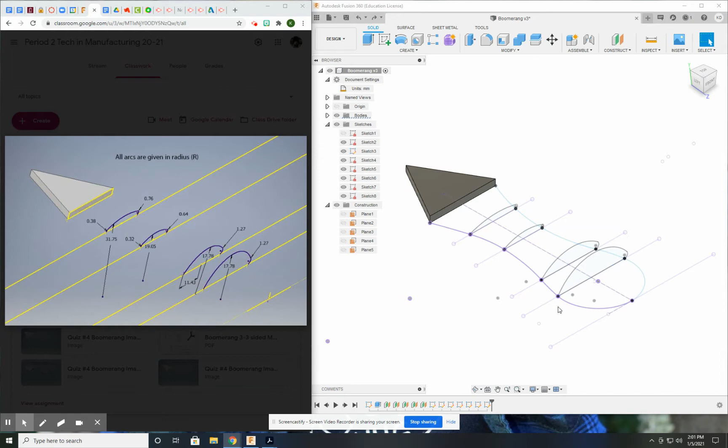So at this point, we have our two guide rails made of arcs, and we created all the profiles that we need. Now, just try and loft it and see what happens. Now, a lot of times it does not loft the first time, so don't get discouraged if that happens. There's very, very often problems that we need to go fix.

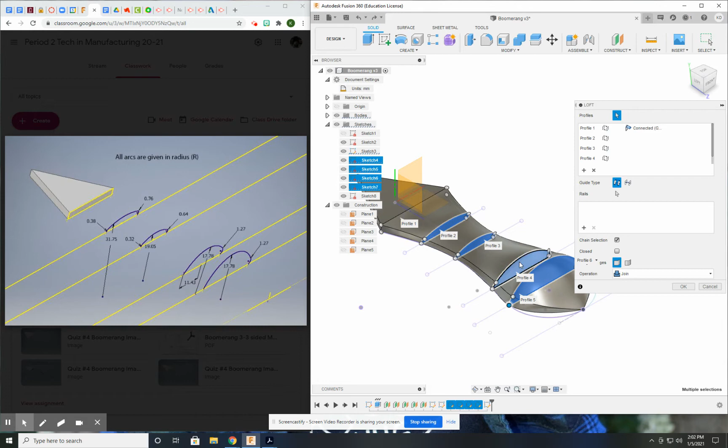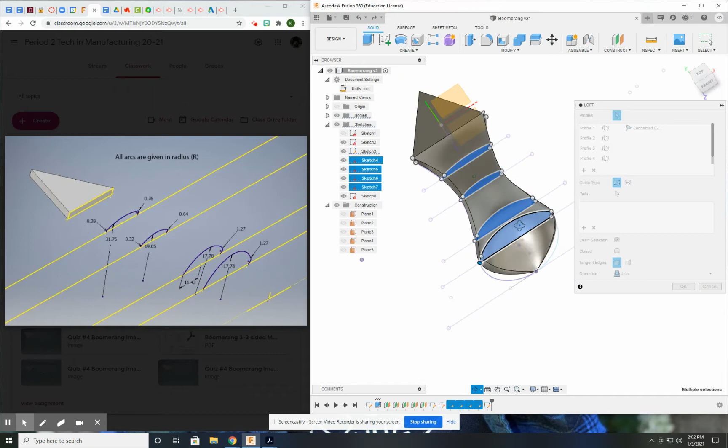All right, the good news is that everything lofted. The profiles are correct. That part actually looks very good. As you can see, though, without my guide rails, there's a lot of area here that the computer doesn't convert into that solid. And that's the specific reason we need the guide rails. There's a lot of lift here that we're going to lose if we don't use the guide rails. And for a boomerang, pretty important.

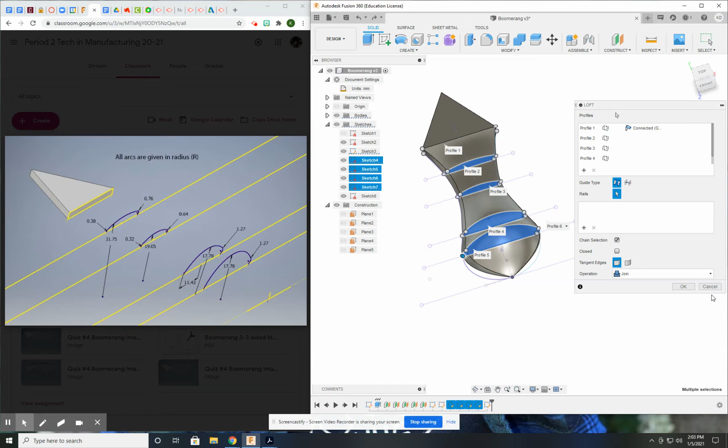All right. So what I can do is try and put my guide rail in right now, but I can tell you right now that there's a problem. Do you see how the arcs that are highlighted are all separate? When I hover my mouse over, this needs to highlight as one single arc or series of arcs that form the guide rail. I made them tangent to each other, so quite often in most programs that will be enough to make it one guide rail, but in this program, which seems to happen a little bit more often than some others, it's not working. So let's go back and do this a different way.

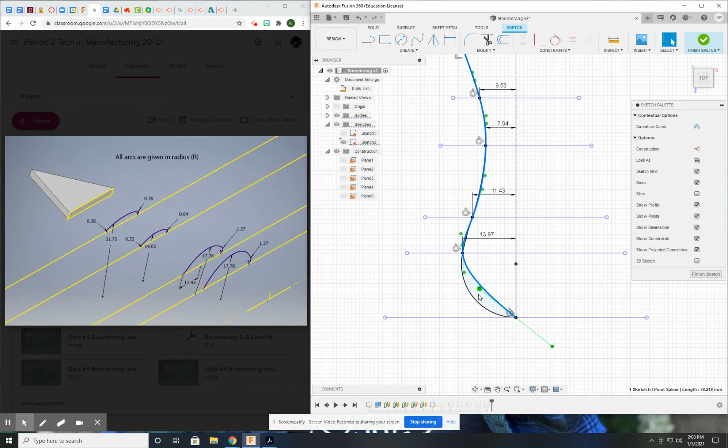So I'm going to go back to my sketch here, and I'm going to use the spline tool, and I'm going to lay it just for demonstration purposes right over the existing series of arcs. And you're going to see that I can get almost the same guide rail shape as if I was using arcs, which is very nice because we really want that smooth, continuous look and feel to it. So if you look right here, gosh, it is almost exactly the same as the set of arcs that I was using. So what you're going to need to do is delete your arcs and just use the spline.

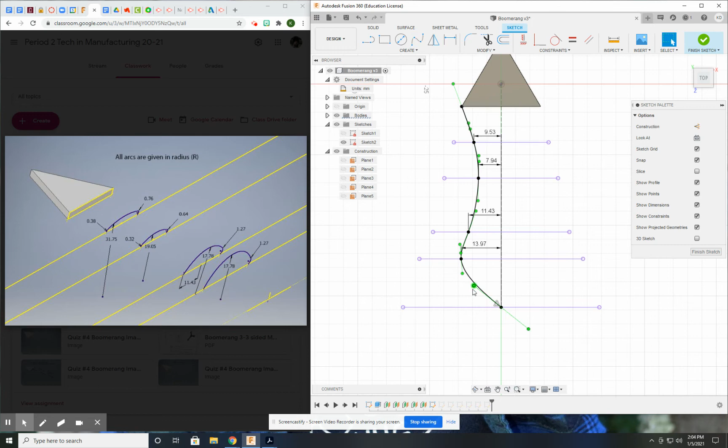Now you may be able to do it right on top, but I'm just going to go ahead and delete the arc and replace it with a spline tool. All right, my points stay, grab the spline tool, use the first option, connect the dots, and then the only thing you really have to do is just do a little modification on this one here to make the tip significantly more rounded. All right, that actually looks really good.

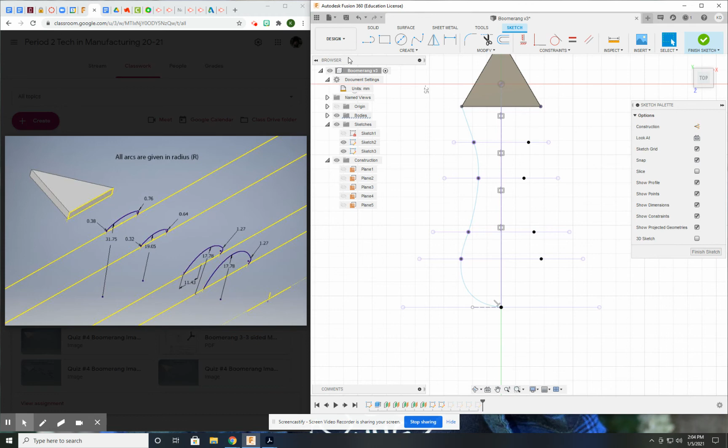I'm going to do the same thing on the right side. No, it's giving me a warning. Let me create a new sketch. Delete that guy. All right, now let's go to the other side, the right side, and do the same thing. Now, because I didn't move any points, there's no problem here as far as losing... if you delete any of these points, you're going to have problems with your other sketches. But as long as my points stay and I only delete the arcs, it shouldn't be an issue. I'm just going to kind of mirror what I see on the left side. And that actually looks really good.

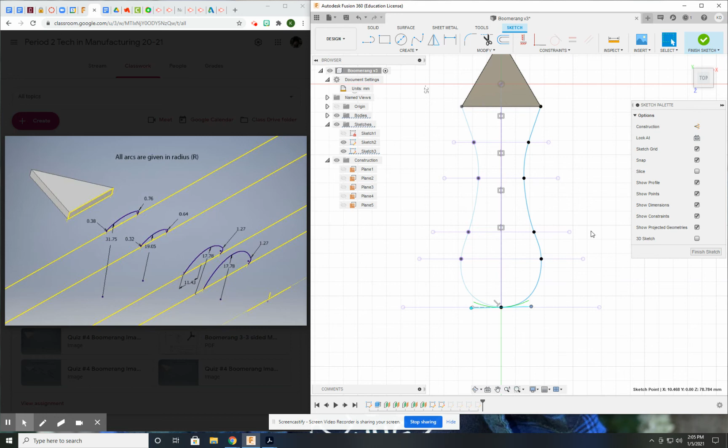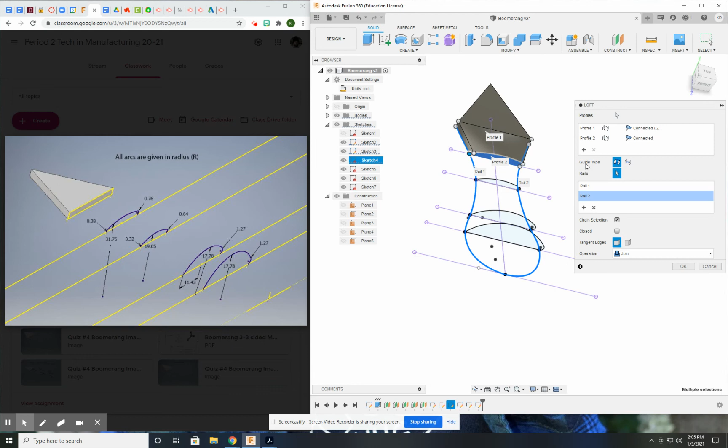So let's go ahead and try and loft now and see what happens. So I'm going to start at the face of the triangle. Oh, get rid of that. Start at the face of the triangle and go to the first profile. Profile 2, and now try and put your rail in. And actually, we're going to put them both in because we have two separate rails, a left and a right. Now go back to the profiles and keep adding profiles in.

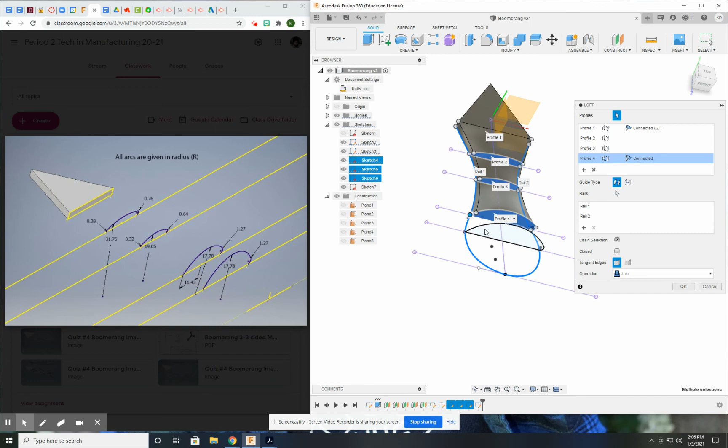Now, if at any point you add profiles in and this gray preview area disappears, it tells you that there's a problem between your profile and the guide rail. And usually what that ends up being is that you didn't import that point on the line into your profile, or vice versa, depending on how you approached the problem.

All right, there it is, guys. That's our loft. Hit OK. That is perfect. That's what we want to see. A very, very nice airfoil shape. It's going to get a lot of lift here. And all we have to do is put an axis right here in the center point of the triangle and do a pattern tool on the other two legs, and we are good to go.